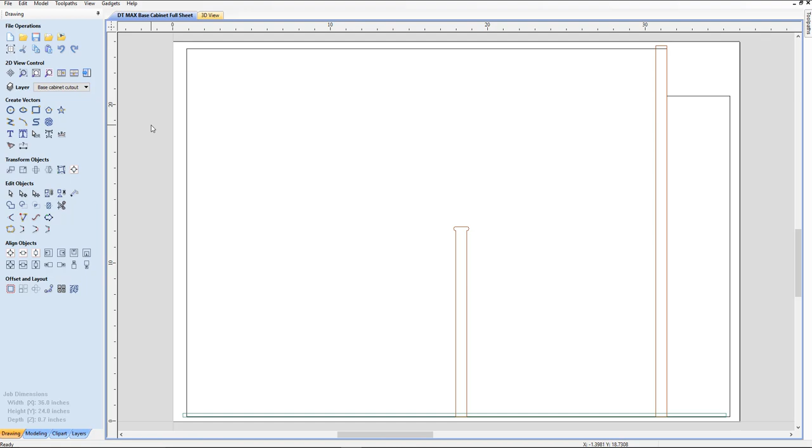We're going to start by opening up the base cabinet that we created for the ShopBot Desktop Max. So open up that file, and the first thing you're going to do is change the job dimensions, because now we want to put this on a full sheet of plywood, which is going to be 96 by 48. Everything else is going to stay the same. So we'll click OK. And now we have our base cabinet side that we developed earlier.

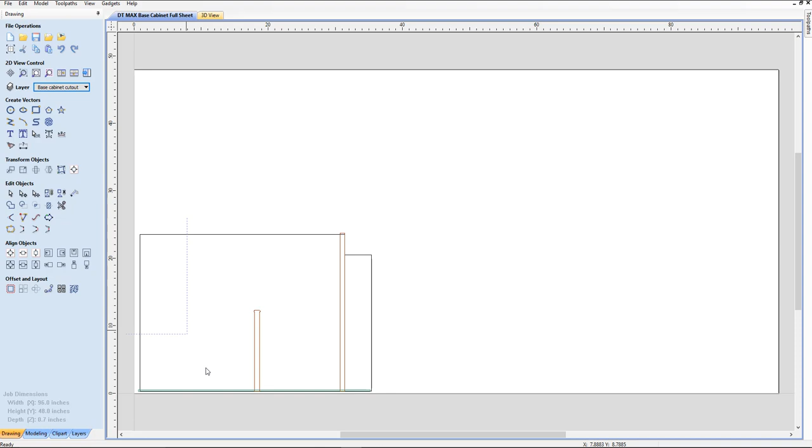First thing we're going to do is check to make sure that we have everything on the correct layer. So rabbet there, that's correct. Shelf dado is correct. And base cabinet cutout. So that's fine. So we're going to select all those vectors. And then we're going to want to make a mirrored image, not a copy, because when ready to assemble, we don't want to have all the sides the same; the left side would be the right side.

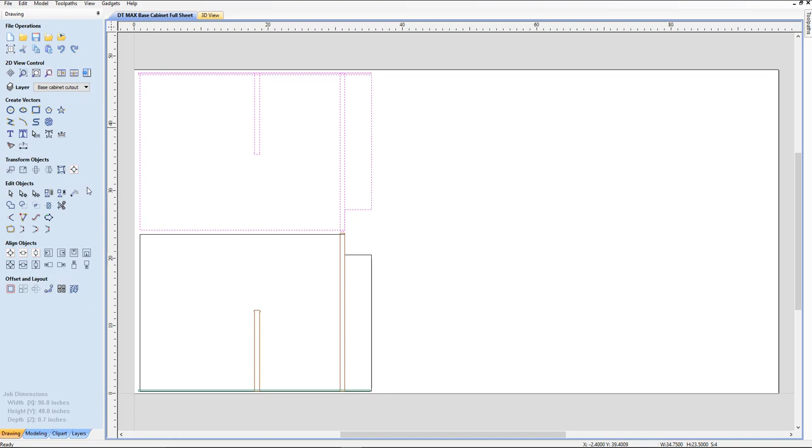So we're going to do a mirror image, create a mirrored copy, and go to top, close this, and using the arrow key on your keyboard, we're going to just move it up slightly and give some room for the 1/4 inch router bit to go around here. Now, in the wall cabinets, we used this tool in offset layout and created a linear array of copies. Well, we can see we're only going to be able to get another 2 sides on this sheet.

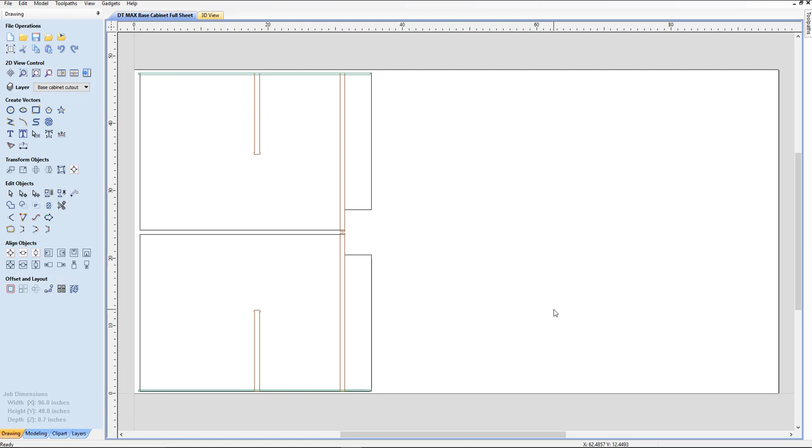So all we're going to do is select the 2 sides that we created here. We're going to do another mirror, and this time we're going to go to the right. We'll close this. Then using your arrows on your keyboard, we're going to move that slightly to the right. Now we have plenty of space left to make some cabinet shelves here. So let's see exactly how many we can get in here.

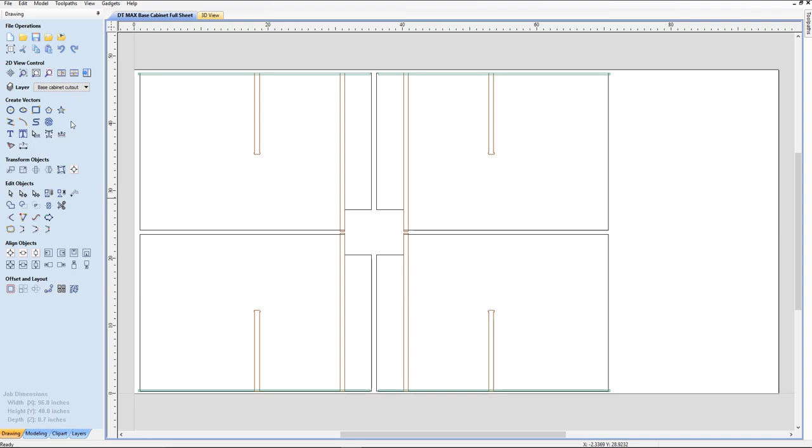So the first thing we're going to do is create a rectangle. But before we do that, we have to figure out what size of rectangle we need. In here I've created a label that shows us exactly what size shelf we need. We're starting out with a 24-inch base cabinet, for example. Face frame overlay about 0.25 on each side. That's negative 0.5. Plywood thickness of 0.7 minus the 0.12 dados. There's 2 of those, so we're going to subtract that as well. So we have a total shelf length of 22.34 to give an external dimension with the face frame of 24 inches.

So we're going to go here and click draw our rectangle. Now if we leave this anchor point here, it's going to come right here, and then we can drag this over here, or we can just take this right here and stretch it out if we want. And we're going to come back over here and change these to match what we have over here,

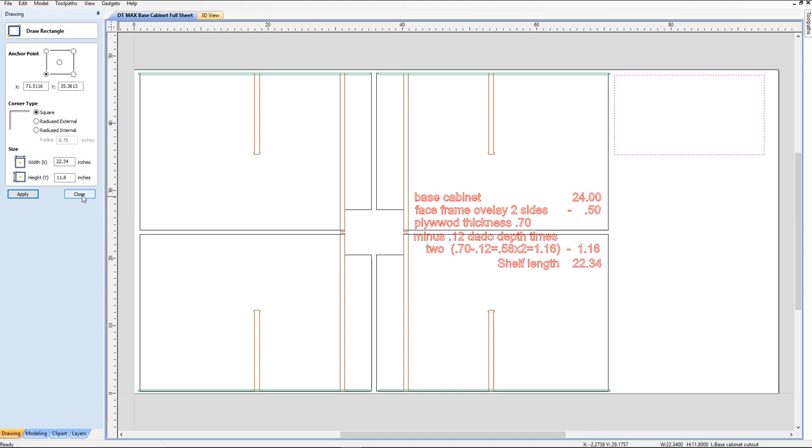22.34. Now, the first one is the middle shelf, which is 12 inches, but we have to take away the thickness of that plywood backing, which is going to be 0.2. So 12 minus 0.2 is going to be 11.8. And we're going to click Apply. And there we have that particular shelf. We'll close this. I'm going to position this up a little bit more because we are going to try to get as many shelves in here as we can.

So I'm going to go over here and click on this again. We're going to go back to mirror image and create a mirror image to the bottom. We'll close this, and then we're going to move this a specific amount. We click the upper left-hand corner, move it relative in the Y position, and we want enough room for a router bit to get by on both sides. So we're going to do minus 0.3. We have a 1/4 inch router bit, so that will let us get through on both sides.

Now, one of the advantages of the vacuum hold down on your ShopBot tables is that it should hold down those shelves without any problem. If you have a small piece here in the middle, that's going to have a tendency to vibrate and possibly break out and get jammed in your bit. So it's better that we just cut everything off in between those.

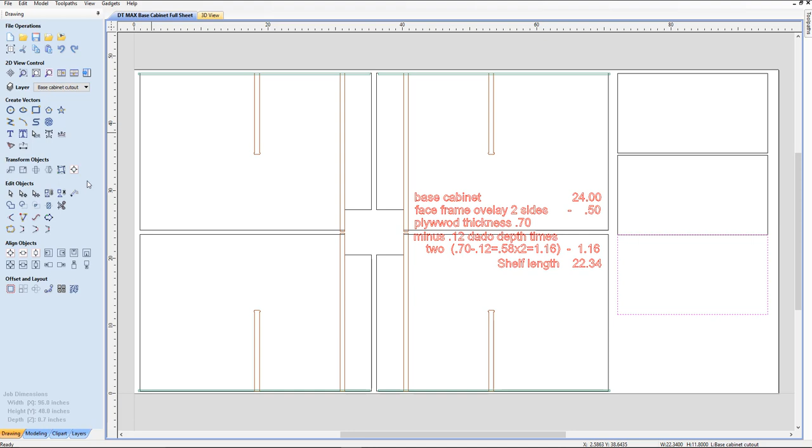Okay, so let's do one more flip over here, and we're going to mirror that to the bottom again. This time we're going to move that relative, Y position, -0.3, apply. Okay, bare minimum that we need. Now, we're going to do the bottom shelf. So when we get through, we're going to have enough for 2 cabinets for the upper shelf, and 1 cabinet for the bottom shelf.

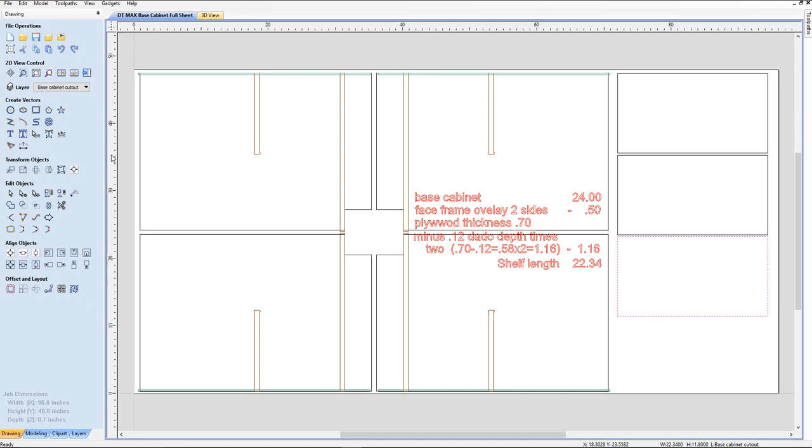So I'm going to go back over here to transform objects, set object size, and we're going to use the anchor point up here to the left. The width is going to stay the same, but the height is going to be different. So remember, this dimension of the cabinet is 23.25 plus face frame of 0.75, finished size 24-inch from back to front. So we're going to subtract 0.2 from 23.25 for the thickness of the plywood. So we're going to have 23.05.

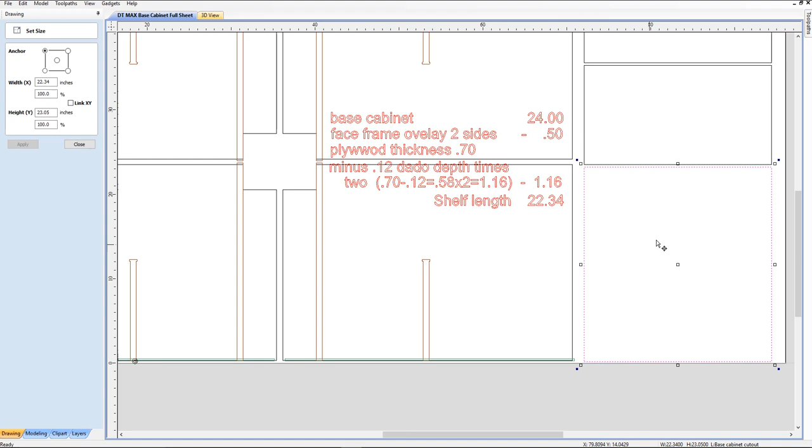Yeah, of course, you make sure that this is not checked before you do this, and we're going to apply. And we're going to look at that, and it looks like we just might be able to get that in place. Now, right here, we could click on this particular shelf and just move it slightly up. Click on this one right here, just move it.

I accidentally hit the delete key instead of the arrow key, and to undo anything, Control Z. Very important. If you make a mistake, Control Z will get you back where you need to go. And I'm going to move this up just slightly. I want to fit everything into the window, so I'm going to put F to fit.

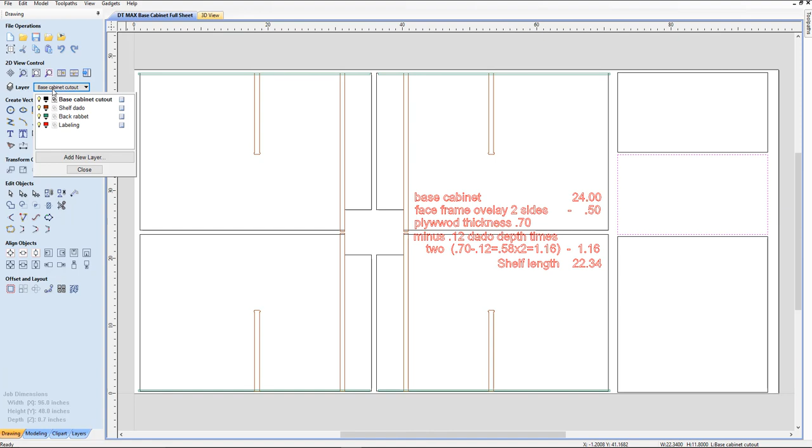We'll close this particular one, and now we'll look over here, and looks like we have everything that's going to fit, so I'll put F to fit. Now I'm going to hide my labeling there. Close this. Now we're going to create the toolpath to get everything out.

And since you're doing a vacuum hold down, the only places that we're going to have to put a tab is actually to keep small pieces from breaking off and getting caught in your machine or in the router bit and possibly jam. These pieces are large enough that your vacuum hold down should be able to hold everything down, especially since we're using a down cut bit which packs the sawdust in there. So you should have a good vacuum on all this.

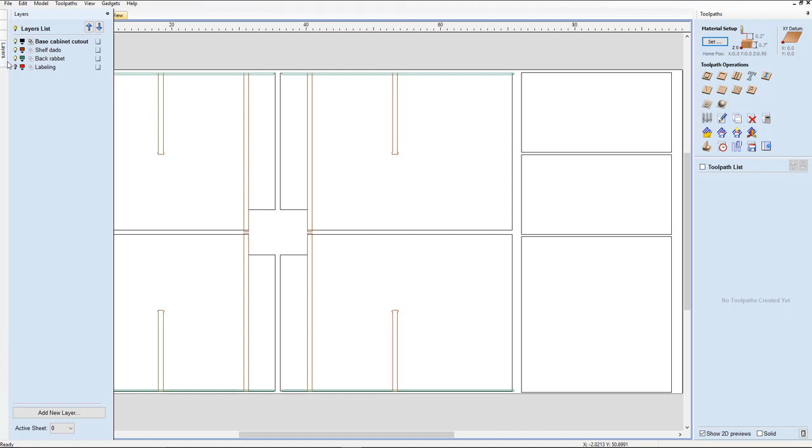Okay, so the first thing we're going to do is we're going to click down this Layers tab, and we're going to start with our rabbet cut first, right there. F to fit. We're going to close that. And we're going to go to pocketing, and we want to go 1/2 inch. That was, I think, the last thing we did here, and the last thing you did on your tool pathing will be what will come up first.

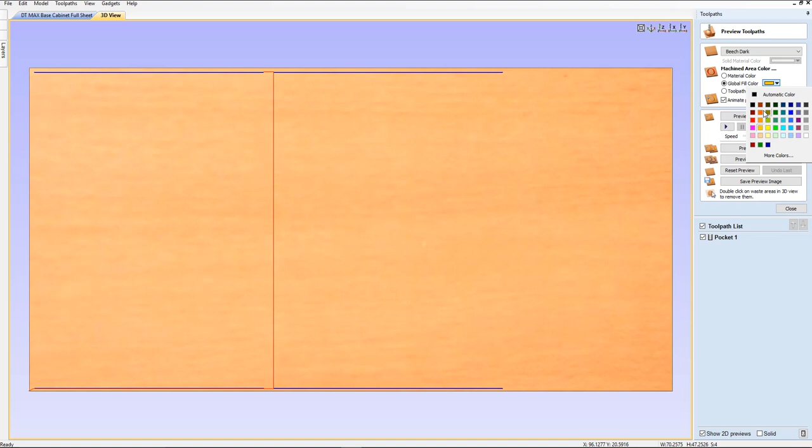We're going to use the same bit, and if you remember correctly, we set this at 3 inches per second, actually 3.25, and a plunge rate of 1 and spindle speed of 12,000. Click OK. And we're going to go ahead and calculate those. Preview selected toolpath. We're going to use a global fill color and use dark brown that gives the best contrast. Preview selected toolpath. There we go.

Now we're going to go back to the 2D view in our layers, and now we're going to turn off the rabbet and just leave the shelves. So this way, when we are able to select everything, click there, we're going to just have to draw a rectangle around everything.

And we're going to go into our pocketing toolpath, but this time we're going to go 0.12, the depth of the dado. This will allow us to still use pocket screws, 1 1/4. Just have to adjust the stop collar to about 5/8 to 3/4, and it should still work. Okay, we're going to use the same bit. Make sure we edit that. Okay, that's good to go.

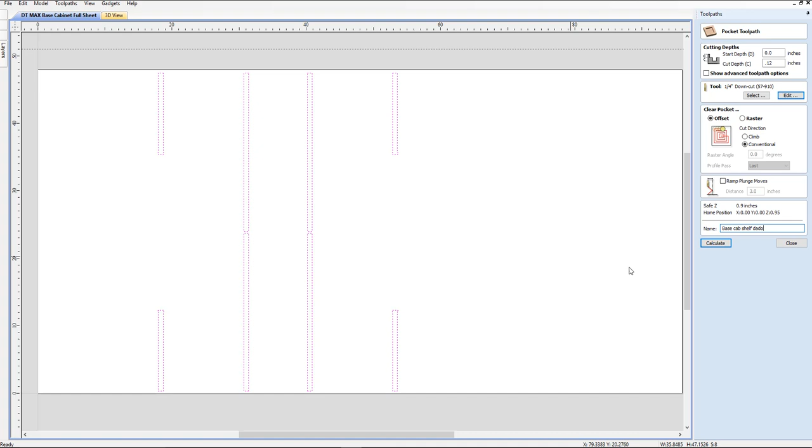Last thing we did. And we're going to name that base cab shelf dado. And I'm going to calculate there. And I'm going to preview selected toolpath. All looking good. Now, notice I forgot to put a label on here.

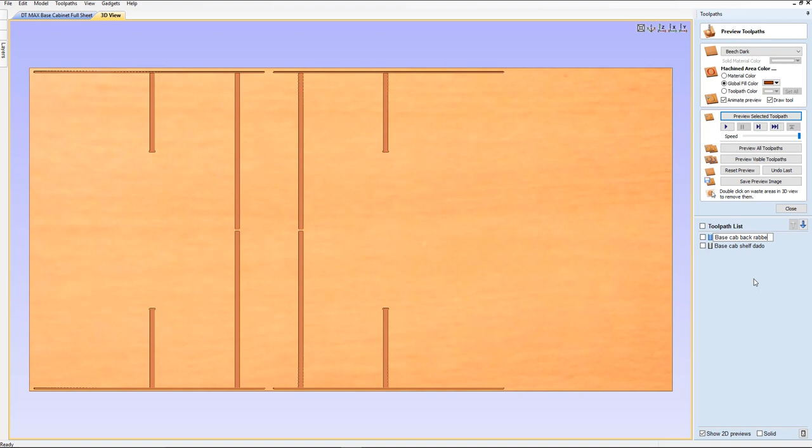So rather than opening it up and having to recalculate, all you have to do is right mouse click, rename, and this is going to be base cab back rabbet. And we're good to go. Go back to 2D view, back to my layers, and then I'm going to do my cutout layers right there.

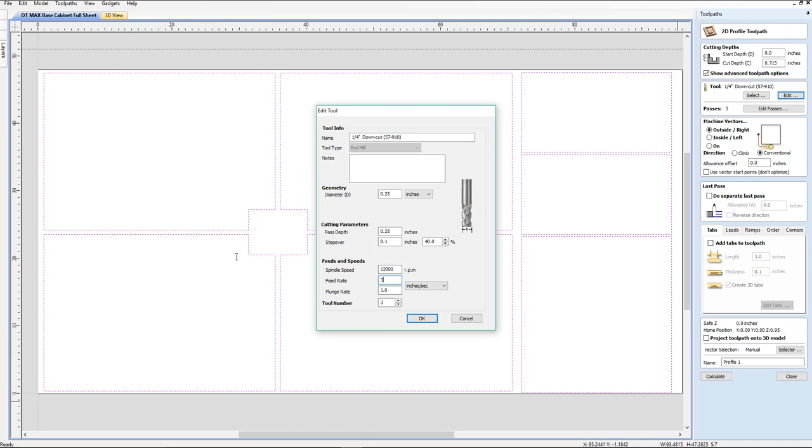Click into the white space, and I'm going to select everything right here. And we're going to close our preview and go into profile cutout. 0.715 should get us easily through the material. Check our speed in this bit. There we go. We're going to go 3 at 12,000 RPM. Click OK. And we want to be on the outside.

Now notice you should always have the show advanced toolpath options. It's a lot easier to use. Gives you the options that you're going to need to go into. Ramps, we want a ramp. Goes in 3 inches, and it says zigzag, we'll take a smooth ramp, faster. And you don't want to directly plunge into material usually. Tough on the router bit, tough on your machine. A lot easier to go with ramps.

Now we're going to add tabs to this. And length of the tab, we want 1 inch, thickness 0.1, and we're going to create 3D tabs. Again, that's a little bit easier for the machine. Instead of going up, stop, and then over, and then down, it ramps up, then ramps on down. So it's easier. And again, the vacuum hold down is what's holding down the finished part. The only purpose of these tabs for you, with the vacuum hold down, is to keep your waste parts from flying around.

Now, what I want to do first, I think, so that'll determine how many tabs I actually need. I'm going to go back here, and I'm going to actually take that tab off. I'll name this base cab full cutout. Calculate. Yes, we want to go through there. Preview all toolpaths.

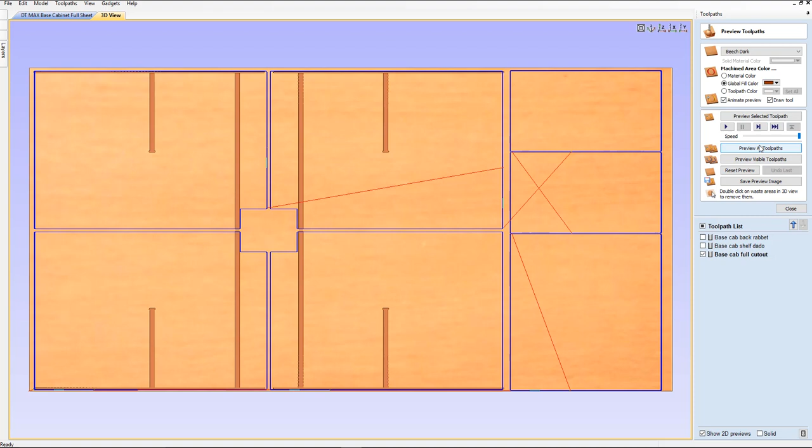Okay, now notice right here, we're not going to need any tabs there. Not going to need any tab on the bottom there. We're going to probably need some tabs on these ends. And what happens right here, this little piece is going to flop around, and it's probably good just to put a little tab there or there. Same thing on this piece right here. We don't want this block coming loose, so we'll probably put a tab in there. But we'll try to minimize the tab. But for sure, we're not going to need tabs right here because the materials are completely cut out.

So I'm going to close this. Go back in here. And we want to go to our tabs, click our tabs, edit tabs. Remember, we don't need anything in here, so we're going to just go ahead. Everywhere you select is going to create a tab. This is just keeping that piece from flying off on you. We don't need too many.

And a lot of times I like to put tabs across from each other because once you cut some of those pieces, you're going to be pretty close for that flying off. So we'll just put around here, here, top, bottom, a few on the side to keep this from flying off. Again, your only purpose of this is to keep these waste pieces from flying off on you. So you don't need too many. You're not really holding the material down. The vacuum is holding it down.

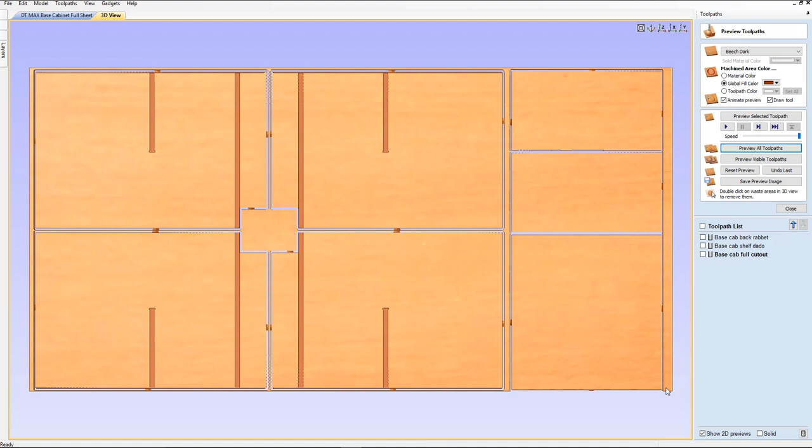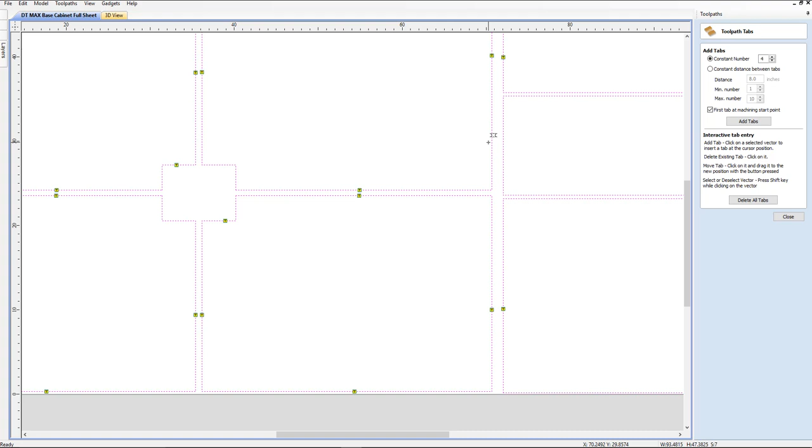So all I have to do is double click on my base cabinet, go back to my tabs, edit tabs, and if I click on this again, it'll, oops, I gotta get closer. You see right here, that's going to add one, a little check mark. If I go right on top, it's got the X, that's going to take it out. Here I'm going to put, there's a check mark, it's going to put one there, and there we go. Close.

Calculate. Yes, we want to go through the material. Reset preview, preview all toolpaths. And let's see what happens. Now that looks pretty good. We're going to close this. And again, I forgot to save this at the beginning, so we'll save it now. Save as, and we're going to give it desktop max base cabinet full sheet.

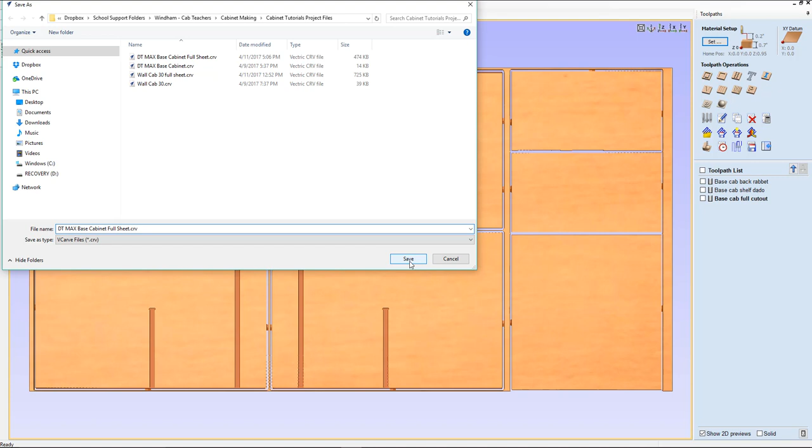Do not save it without renaming it, because then you're going to write over the original file, and you want to keep that if you want to cut a base cabinet on the desktop max. Okay, so we're going to save that. Okay, I'm going to write over the one I had there. Now we're going to save that toolpath so we can select all of them. Remember, the last one that you want to do is your cutout. We're doing it with the same bit, so we don't have to change bits. So we're going to save toolpath.

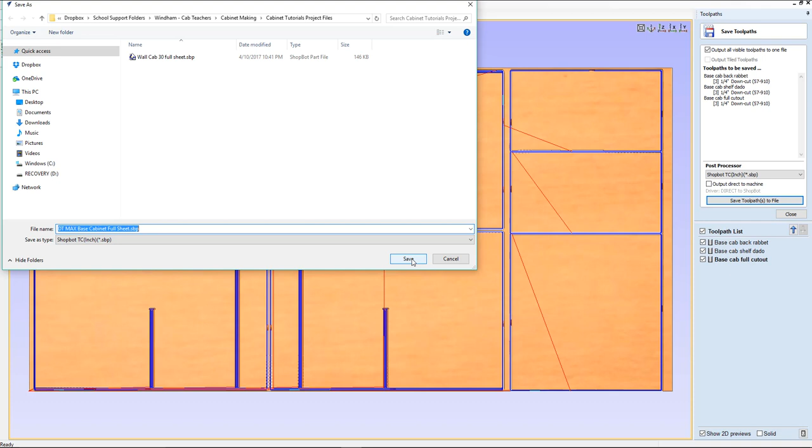Again, we've clicked over here, output visible toolpaths to one file. If you've got everything clicked at the bottom, but only one shows up there, it means you have not selected this right here. So we'll select that. And I'm going to save toolpaths to file. And we already have the wall cabinet. We are now with the base cabinet full sheet. And we are going to save that. That's going to be the cutting file.

Save that. And now we're good to go. And we'll go ahead and save that file again now that we've renamed it. Save it. And we can exit. We're good to go, ready to run.